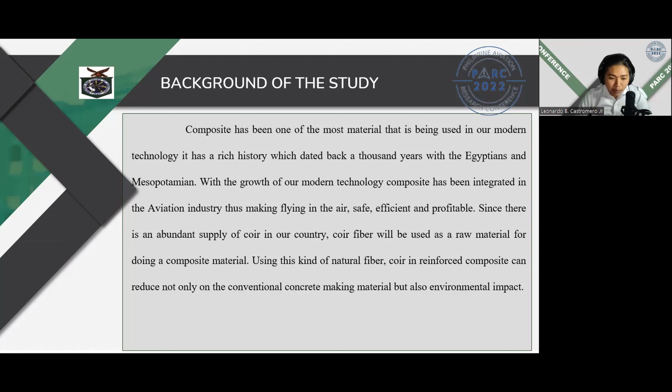The strength of coir fiber reinforced composite tends to decrease with the amount of fiber, which indicated ineffective stress transfer between the fiber and matrix. The introduction. Composite is material produced using at least two unique materials that, when combined, are stronger than those individual materials by themselves, or we can simply say that composites are a combination of components.

Another type of composite is the biocomposite, which is the eco-friendly one. This type of composite consists of a large variety of organic and or inorganic components, such as natural polymers. Natural fibers are widely used under the biocomposite. They are reinforcing fibers that are derived from renewable and carbon dioxide neutral resources such as wood or plants.

Coconut fiber is extracted from the outer shell of a coconut. Coconut fibers are stiff and tough and have low thermal conductivity. This part of the coconut serves as an asset for natural fibers, which are used to support polymer composites. Coir fibers are strong and stiff, which are prerequisites for coir fiber reinforced biocomposite materials.

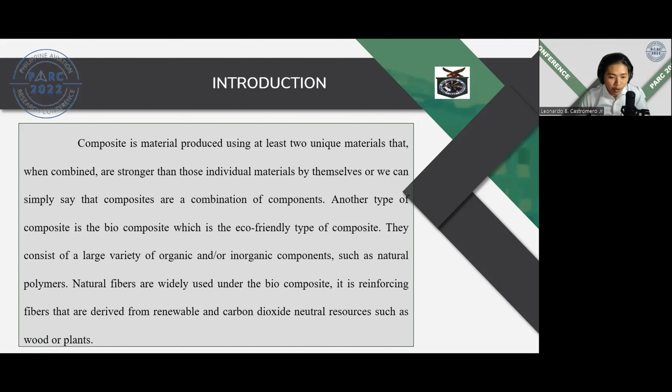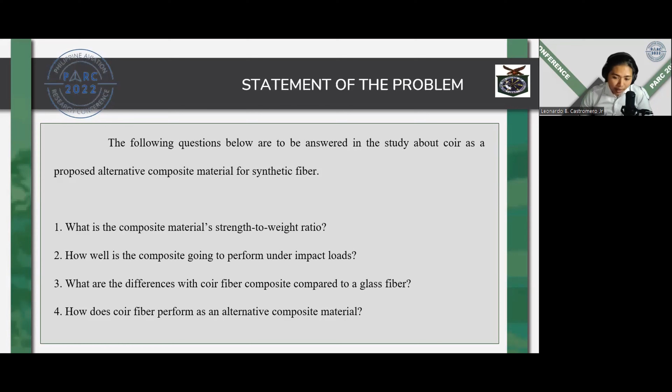Statement of the problem. The following questions below are to be answered in the study about coir as a proposed alternative composite material for synthetic fiber. Number 1. What is the composite material's strength to weight ratio? Number 2. How well is the composite going to perform under impact loads? Number 3. What are the differences with coir fiber composite compared to a fiberglass? Number 4. How does coir fiber perform as an alternative composite material?

Related literature. According to Majid Ali and others, he investigated and studied the versatility and application of coconut fiber in different kinds. He concluded that coconut fibers are reported as more ductile and energy absorbent material. It is concluded that coconut fiber has potential to be used in composite for different purposes. Natural fibers are environment-friendly materials and have proved to be competitive with glass fiber or polyester in terms of strength, performance, and cost, according to Baiarda and others.

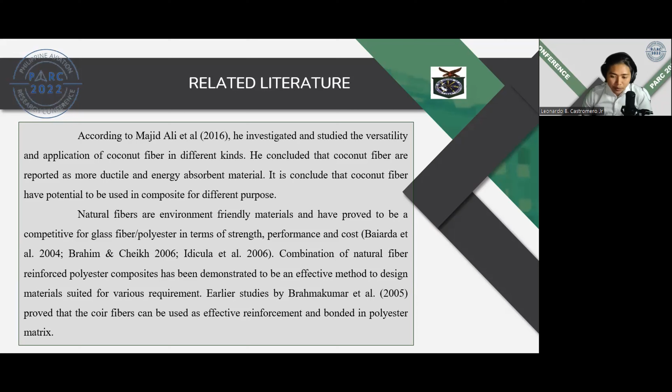Combination of natural fiber reinforced polyester composites has been demonstrated to be an effective method to design materials suited for various requirements. Earlier studies by Brahmakumar and others proved that the coir fibers can be used as effective reinforcement and bonded in polyester matrix.

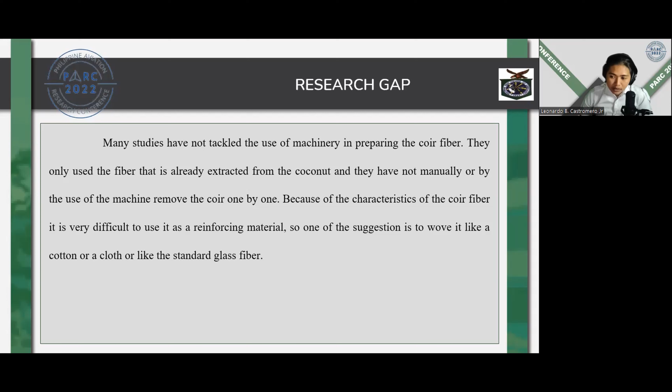Research gap. Many studies have not tackled the use of machinery in preparing the coir fiber. They only use the fiber that is already extracted from the coconut, and they have not manually or by use of machine removed the coir one by one. Because of the characteristics of the coir fiber, it is very difficult to use it as a reinforcing material. So one of the suggestions is to weave it like a cotton or a cloth or like the standard glass fiber.

Conceptual framework. The diagram shows the steps and procedures that will be conducted for the completion of the study. The first step is preparing all the materials needed in making the composite materials such as polyester resin, hardener, coir fiber, brush, tapes, and sandpaper. The researchers will make a sample molder to precisely mold the composite material and it will be cured with plenty of time. After that, mix the proper ratio of polyester resin and hardener.

Mix it well. Then first, the application of the first layer of polyester resin to the mold using a brush. Second, place the coir fiber reinforcing material on the matrix. Third, apply resin on the top of the first layer of reinforcing material. Repeat the second and third step until there are 3 layers of reinforcing material. Key the entire surface again for the next coat of resin so the next layer attaches stronger and let it cure.

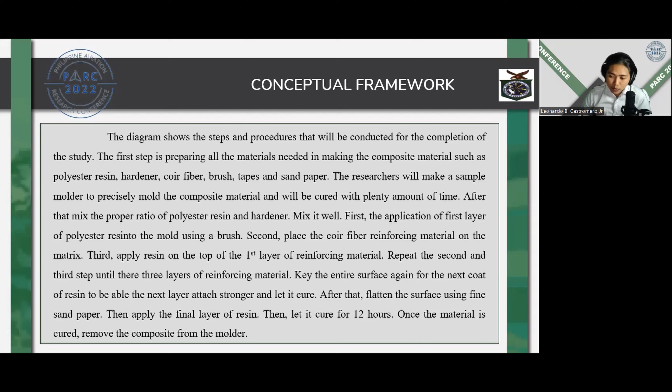After that, flatten the surface using fine sandpaper, then apply the final layer of resin. Then, let it cure for 12 hours. Once the material is cured, remove the composite from the molder.

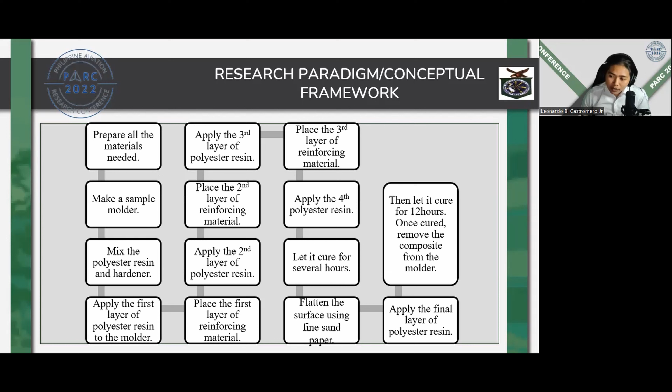Next is to place the third layer of reinforcing material. Then apply the fourth layer of polyester resin. Then let it cure for several hours. Next is to flatten the surface using fine sandpaper. Then apply the final layer of polyester resin. Then let it cure for 12 hours. Once cured, remove the composite from the molder. Research methodology.

The researchers created a research title and presented it to the advisor for approval and to give feedback on said title. After approval of the title, the researchers started to conduct a search for related topics and information using various resources such as online journals, internet, books, published and unpublished theses.

This study focused on the manufacturing of fiberglass reinforcing materials and an alternative coir fiber reinforcing material. After the manufacturing has been done, the built molded fiberglass and coir fiber will undergo several testings and checking, and this stage will help the researchers to build up conclusions.

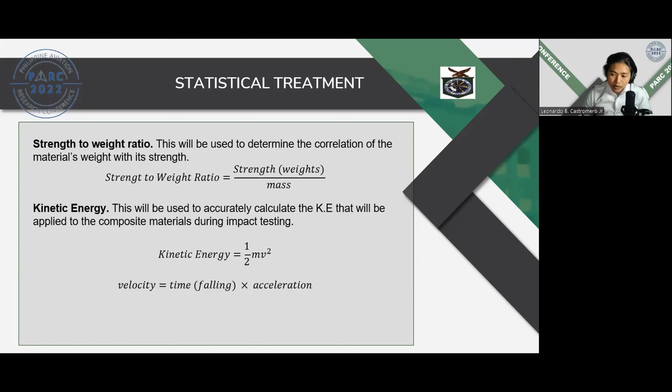Statistical treatment: strength to weight ratio. This will be used to determine the correlation of the material's weight with its strength. Strength to weight ratio is equal to strength times weight over mass. Kinetic energy. This will be used to accurately calculate the kinetic energy that will be applied to the composite materials during impact testing. Kinetic energy is equal to 1/2 mv squared. Velocity is equal to time times acceleration.

Statement of the problem number 1. What is the composite material strength to weight ratio? Finding. The descriptive statistics show that coir fiber from sample 1 to 4 has an average strength to weight ratio of 36.11, while its counterpart has an average strength to weight ratio of 52.31. Conclusion. The researchers concluded that increasing the amount of coir is directly proportional to its weight and strength. Therefore, aiming to provide good strength, a high amount of materials is needed.

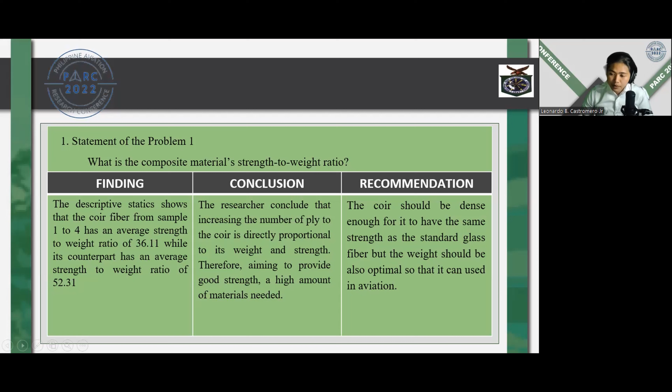Recommendation. The coir should be dense enough for it to have the same strength as the standard glass fiber, but the weight should also be optimal so that it can be used in aviation. Statement of the problem number 2. How well is the composite going to perform under impact loads?

Findings. Based on the result, the coir fiber impact load nearly reached the impact test results of the fiberglass. The coir impact results are nearly the same compared to fiberglass results, which may denote that coir fiber can also handle the impact load that the sample with fiberglass can. Conclusion. Based on the impact test of the two types of material, coir and fiberglass, the coir had a minimal visible crack while the fiberglass was neat and durable.

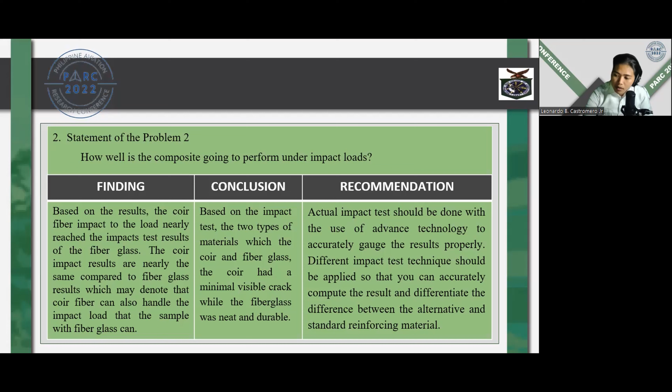Since fiberglass is the basis of this study, the researchers conducted the test to ensure the amount needed for the coir to be able to replace synthetic fiberglass composite material. Recommendation. Actual impact tests should be done with the use of advanced technology to accurately gauge the result. Different impact test techniques should be applied so that you can accurately compute the result and differentiate between the alternative and standard reinforcing material.

Statement of the problem number 3. What are the differences of coir fiber composite compared to glass fiber? Finding. There were clear differences between the two when both are studied. The coir fiber from sample 1 to 4 has an average strength of 7,537 grams, while the fiberglass from sample 1 to 4 has an average strength of 9,912 grams. Based on the results, fiberglass has much more strength compared to coir fiber.

A small amount of weight can cause a large amount of strength for fiberglass, while coir fiber needs more weight to have greater strength. More coir fiber is needed to be able to compare its strength to fiberglass. Conclusion. In terms of strength, fiberglass is better than coir. Since the researchers' goal is to provide an alternative for fiberglass, which is coir, several tests were done and proved that a huge amount of coir will provide the strength needed. Recommendation: further develop the coir fiber composite mixture in order to create an optimal strength compared to fiberglass.

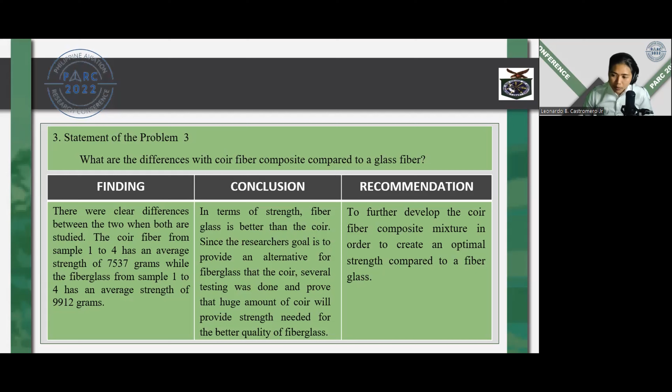Statement of the problem number 4. How does coir fiber perform as an alternative composite material? Findings. As an alternative composite material, coir fiber can be the best one due to its strength capacity. Since coir is readily available in the Philippines, the need for a greater amount of coir is not a problem. To ensure that coir can be the best replacement, it needs to overcome the load impact capacity of fiberglass. With that, adding a greater amount of coir will provide better results.

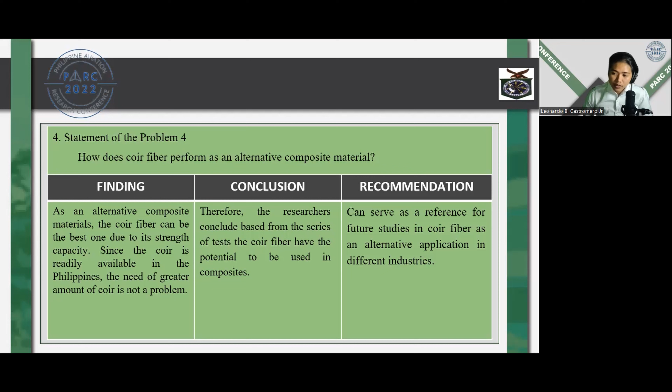Conclusion. Therefore, the researchers conclude, based on the series of tests, that coir fiber has the potential to be used in composites. Recommendation: it can serve as a reference for future studies on coir fiber as an alternative application in different industries. Here is a video clip of our experiment.

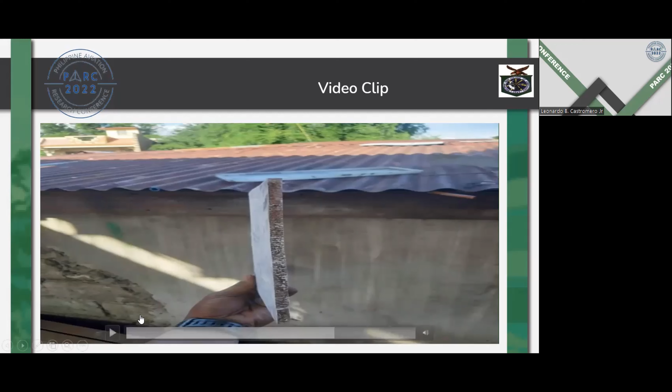And then we put our coir fiber and put some mixture on it. And then we made our composite using fiberglass as a reinforcing material for comparison. And this is how it looks when we are curing it. And this is how our coir fiber looks when we have keyed it using fine sandpaper. This is the side view of the material. This is what it looked like when we sanded it using grinders. And these are all our samples. And these are the samples for the fiberglass. And that's all.